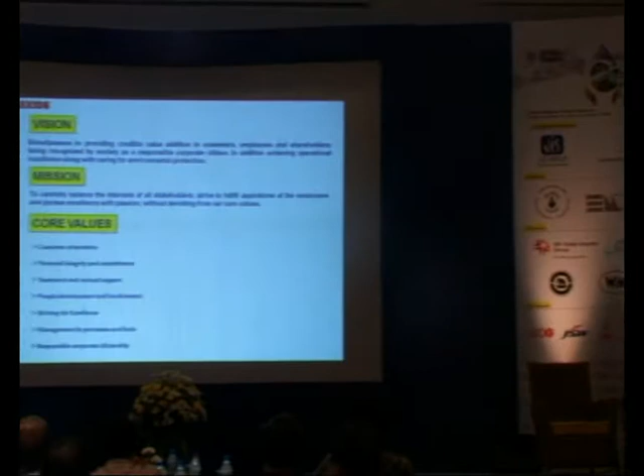Now, just to share, the vision of our organization is to simultaneously provide credible value addition to customers, employees and shareholders, being recognized by society as a responsible corporate citizen, in addition achieving operational excellence along with caring for environmental protection. And why I uttered this corporate vision is that we have to care for our Mother Earth, and we have to act accordingly. The vision is supported by mission and definitely our core values.

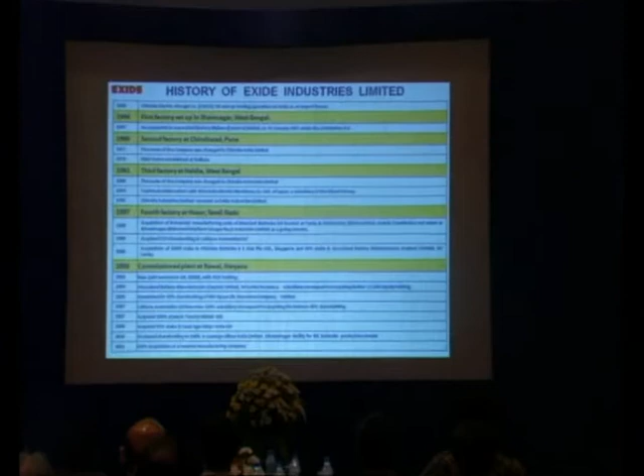Now, history of our industry: our operation started in 1916 as a trading company. Our first manufacturing plant was established in Shamnagar, West Bengal in 1946. Haldia plant is the third plant in the organization. Now, just a quick go-through: we have 7 operating plants, 2 R&D centers, 4 regional offices. We have almost 5,000 employees, 12,000 dealers, and 22 cities are covered with Batmobile service.

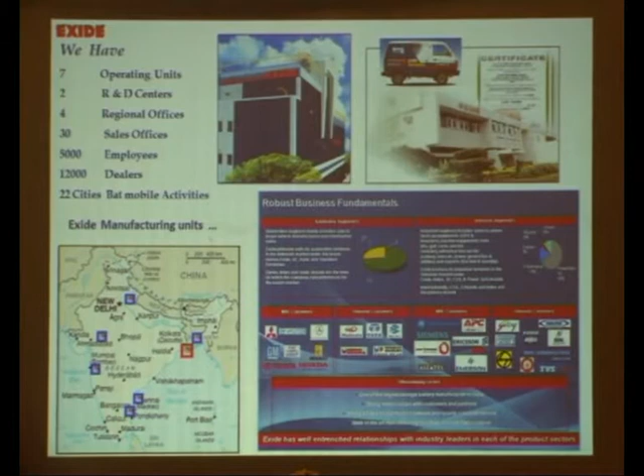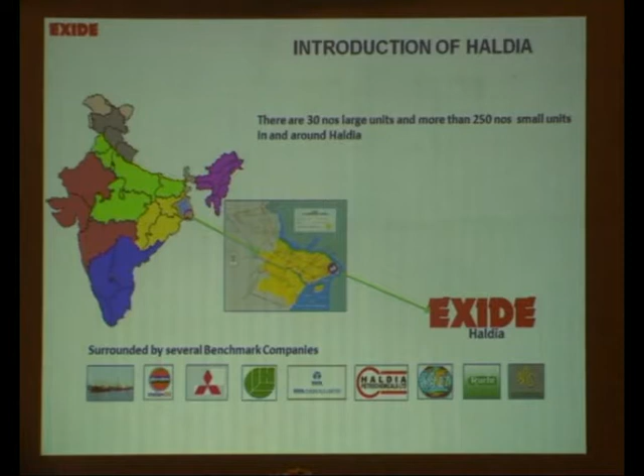It's a very unique service for any battery user. We have a toll-free number. Anybody can call that number and get a free service wherever it is, maybe in house or on the road. Now, about Haldia, our plant is surrounded by a number of benchmark companies, so we have more responsibility to meet the targets.

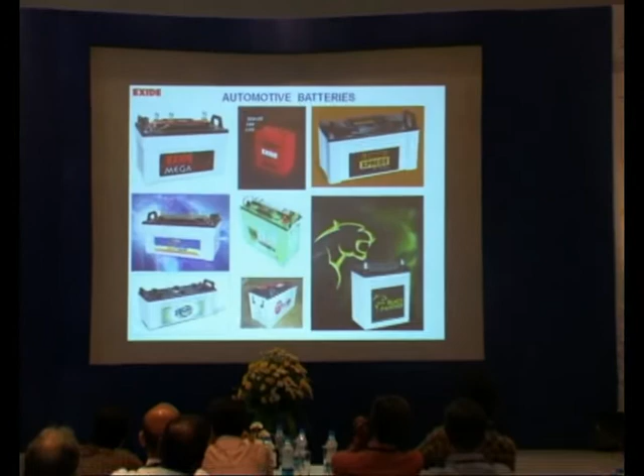As for our plant, we have 42 acres of land, around 48,000 square meters of floor space. And we have around 680 employees, and 2 types of product we manufacture here, automotive and industrial. Now, these are the products used in automobiles and also for home UPS. The products used in industrial applications range from forklifts, golf carts, home UPS, and the Reva electric car, to power plants.

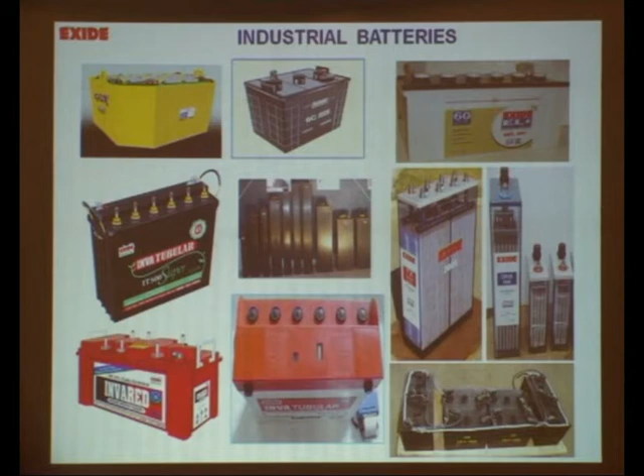We follow systems. We have quality management systems and environment management systems. We are a TPM practicing factory, and we have strong quality circle activities and small group activities for problem solving. Now, in today's discussion, the key focus is on pollution control through effluent treatment, and also process modification so that total effluent volume comes down.

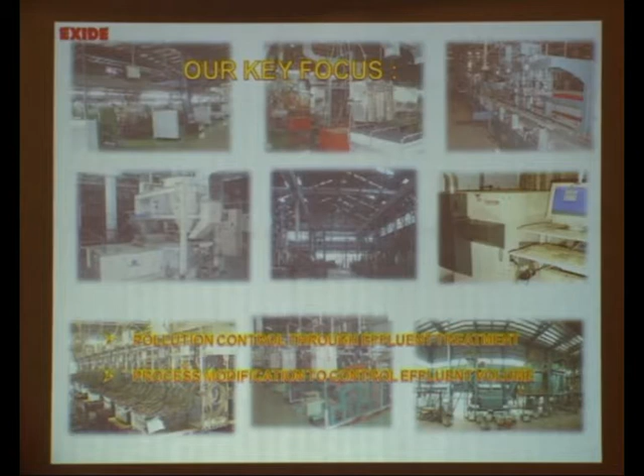Now, just to tell you, the battery is based on lead and acid. Both are very problematic materials, and we also use PP containers as the container for the battery. For using these materials, any battery manufacturing unit has been categorized as a red category industry.

Now, that gives us a lot of responsibility to see the proper effluent treatment is taken care of, because any battery manufacturing unit will require a lot of water to be used, as that is a process requirement. With that responsibility, at each and every stage we take care that the effluent generated is treated properly and reused wherever possible.

We call it plate formation, meaning a green plate is formed as a battery plate. There we have to put a lot of energy in presence of sulfuric acid and water, and that actually makes those plates ready to be used in a battery.

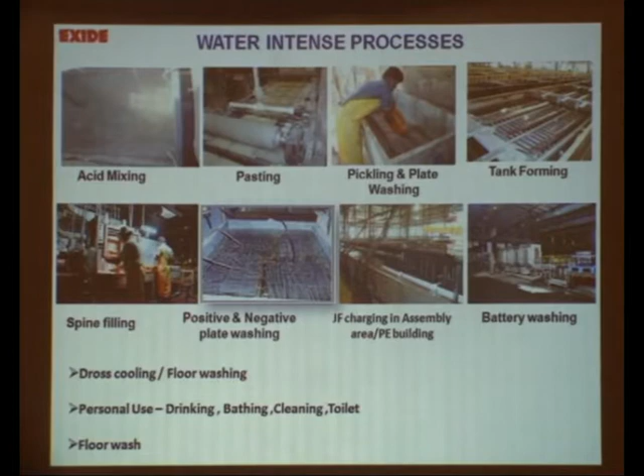Then formation is a process where we put energy from outside, and then other processes are washing and again the formation process. Another is tank charging, meaning the battery after finishing has to be charged before dispatch. So all these processes require a lot of water, and additional water is required for the dross, which is basically sludge of lead, for cooling, and also for personal use and floor wash.

For the implementation plan, after testing the water quality, we found that some areas of water could be reused. Then, through brainstorming, we found out the areas where that water could be reused.

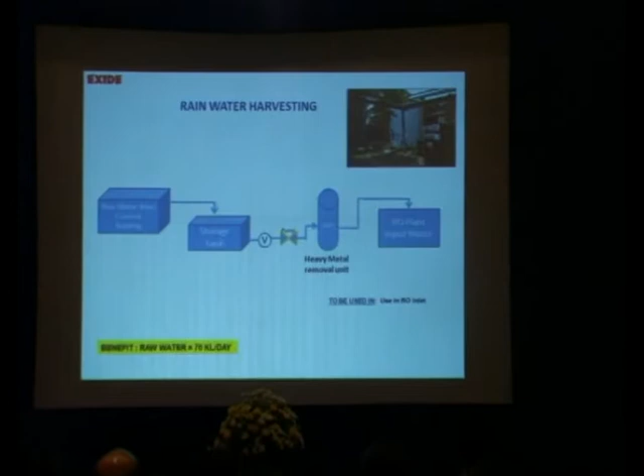The rainwater harvesting plant we have is small, not a big plant, and we have already established this almost in the rainy season. We can save almost 70 KL of water through this plant.

Now, paste recovery system is a process where we actually put active material to a plate. This is basically called the wet process, shown in some photographs earlier. This wet process generates a lot of water which is mixed with acid and lead. We have taken this back to the same process because it has helped us reduce reuse of material, that is lead, and also water.

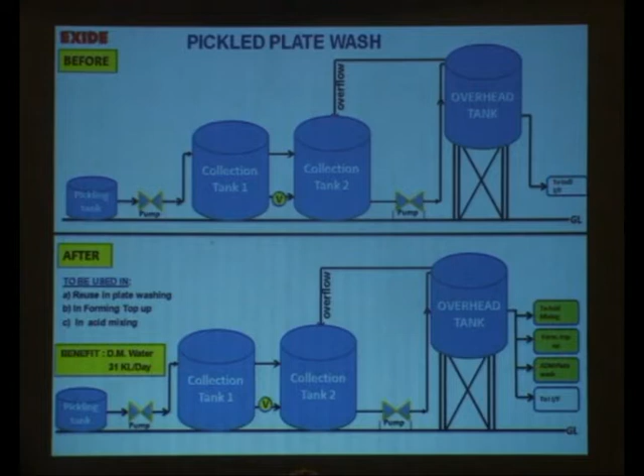Now, sewage treatment plant we are reusing for gardening. Pickling is basically a process where we wash a positive plate, and earlier we used it only for the toilet. Now we have added three more processes where we use this water.

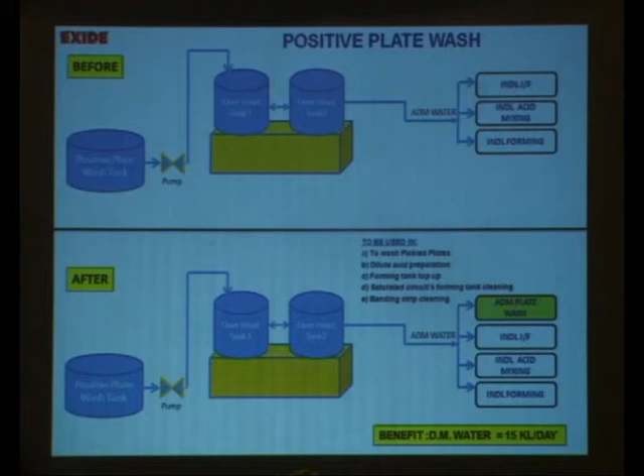Similarly, the positive plate water we started reusing more in one more area. This is an acid recovery plant, which is very important for us. The formation is a process where we put energy into the battery plate in presence of sulfuric acid solution.

Now, this acid used to go to the ETP drain for treatment and then discharge, and it used to generate a lot of sludge. Now we are recycling and reusing this as a top-up acid for the formation process.

Similarly, the acid dilution process was earlier manual, now we have made it mechanized, and in this process we have saved a lot of acid as well as water.

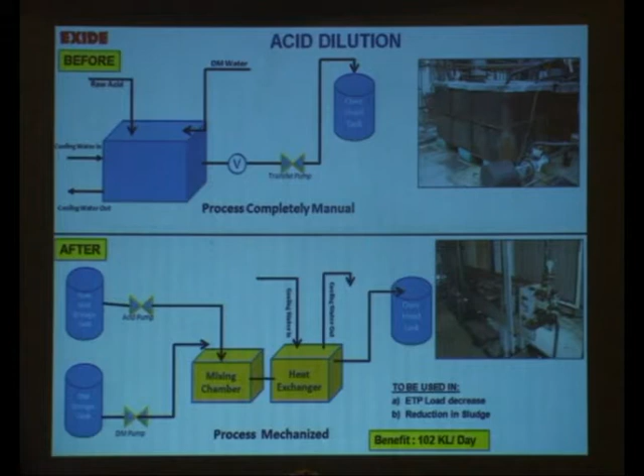This is a process called slurry filling. In this process, we actually fill the positive plate with active material. Earlier the slurries used to go to drain and then to the ETPs. Now we are recycling that - water is being reused and also slurry is being reused.

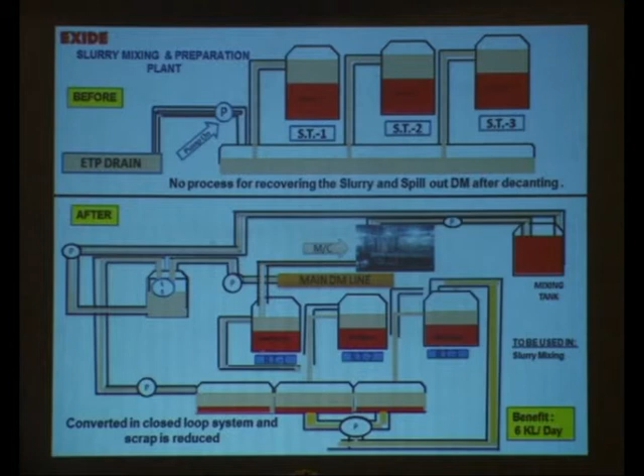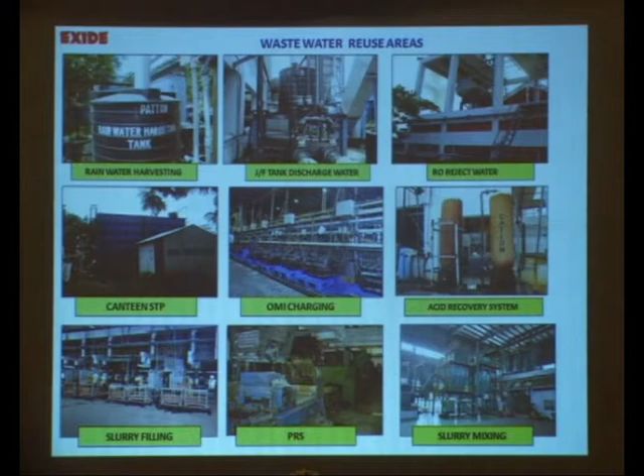Now, the benefits after this implementation - we have got almost more than 300 KL of water saved compared to if I consider today versus 3 years back. These are the areas where the processes or systems we have put in place to reuse wastewater which used to be waste earlier.

Now, results. If you see the consumption of raw water, it has drastically come down. This is a 3-year result which shows from 3 years back to now is almost 25% reduction. Processed water consumption also has come down after implementing this process - last year we got around 10% reduction.

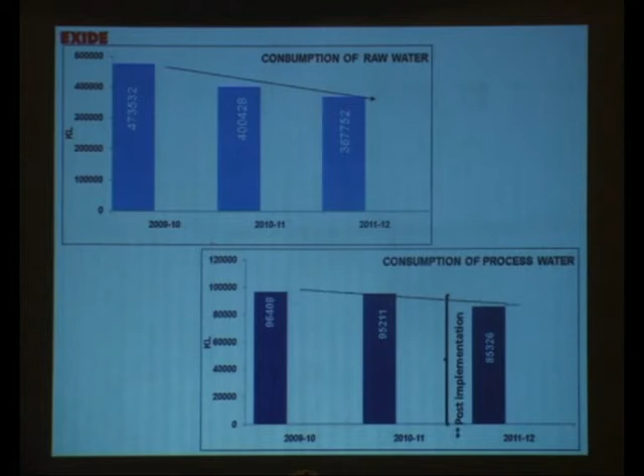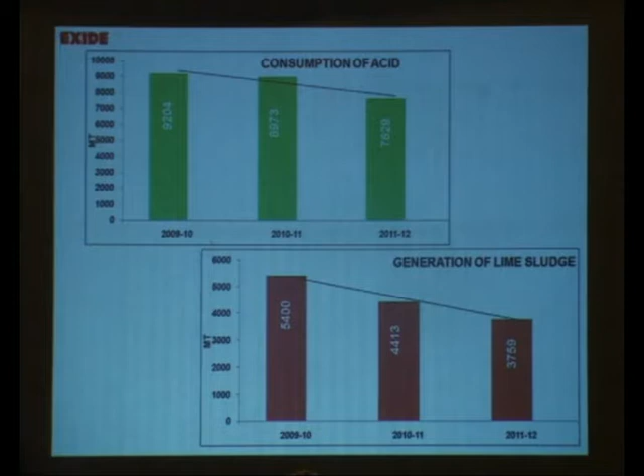Similarly, the consumption of acid has also come down, which is important because our effluent generation mainly contains acid. So in a few areas we have started reusing those acids, and acid consumption has also come down, which resulted in sludge generation in ETP also coming down - almost 15% reduction.

Now, cost benefit - last year we got around 47 lakh in savings by doing these activities.

Now, the thing is that designing and implementing things are very easy, but sustenance is the main process which takes a lot of time, and this is a more focused area, otherwise we cannot survive.

Now, our process of sustenance is that we monitor every day's water consumption. A daily MIS is generated, and I personally look after this water consumption, which also includes the area-wise water consumption.

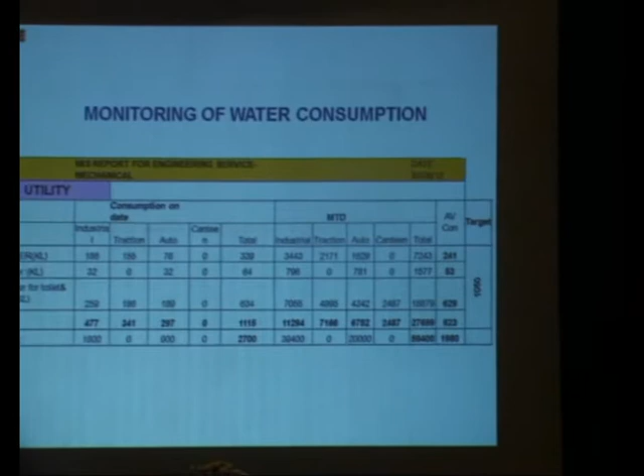Then comes the acidic effluent, concentration of acid in the acidic effluent, because if the concentration is more, then effluent generation treatment will be difficult, and it will generate more sludge.

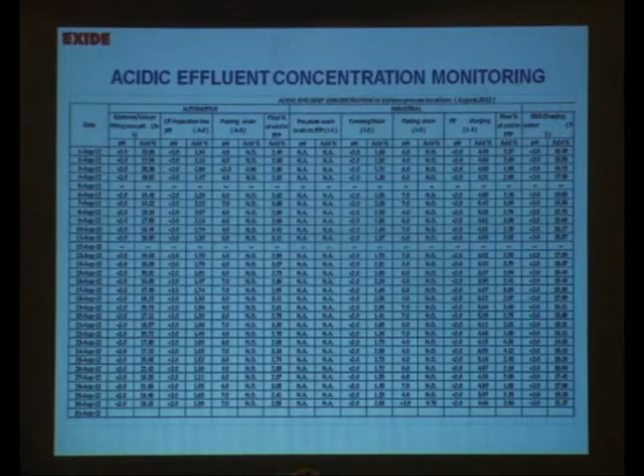Similarly, all ETPs are basically monitored to see the effluent generation, acid concentration, the lime used to neutralize that acidic water, and also the sludge generation. So daily monitoring is done, and the water discharge from ETPs is monitored by us daily and also by external sources.

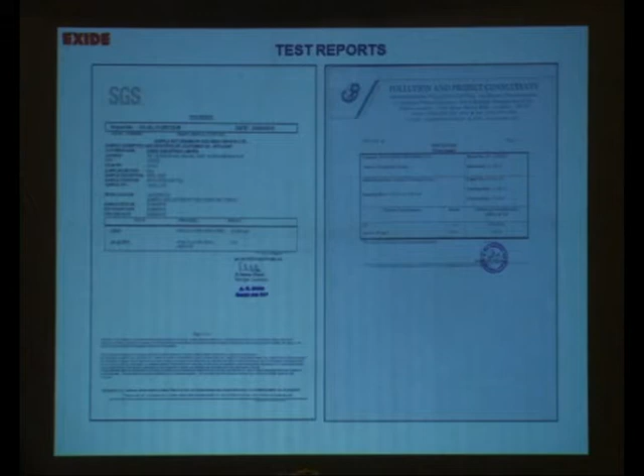Our future target is very ambitious, but the Haldia team has taken the target that today's effluent volume will be reduced by 50% in the next 3 years' time.

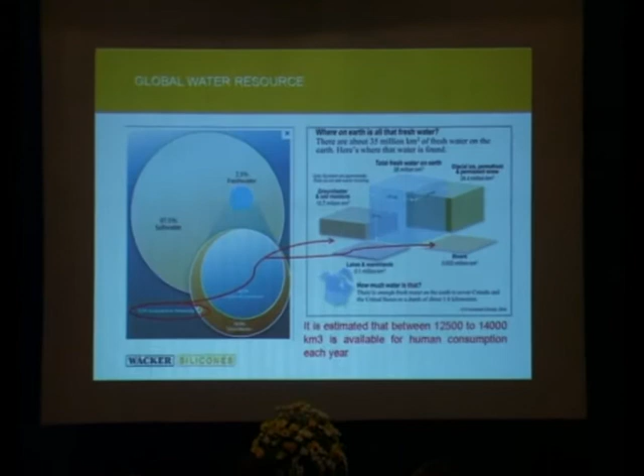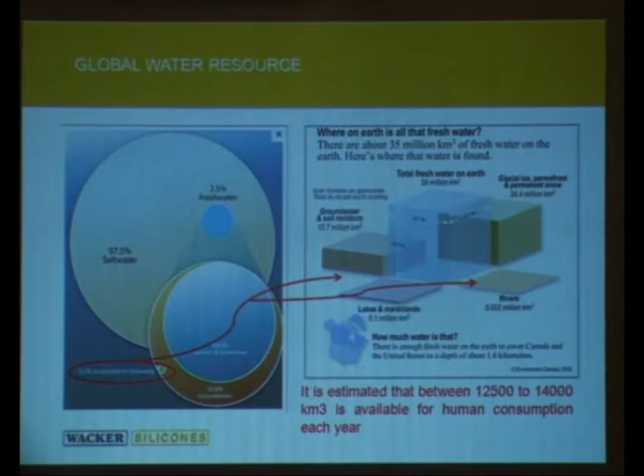Now we come to global water resources. Since our early boyhood, we have learned that on earth there are 3 parts water and 1 part land. It is true, but practically we should know how much water present on earth has accessibility to humanity. Of total water on earth, salt water is 97.5% and fresh water is 2.5%. Of this 2.5% fresh water, around 70% is glaciers and snow cover, 30% is groundwater, and only 0.3% is accessible to humanity. In figures, there are about 35 million cubic kilometers of fresh water on earth, of which groundwater and soil moisture is 10.7 million cubic kilometers, glacier ice, permafrost and permanent snow is 24.4 million cubic kilometers, lakes and marshlands 0.1 million cubic kilometers, and rivers 0.002 million cubic kilometers.

Humans can take water from groundwater, rivers, lakes and marshlands. What is the amount? It is estimated that between 12,500 to 14,000 cubic kilometers is available for human consumption each year. Still, we have shortage — for 1 billion people, safe water is scarce. Many countries in Africa, the Middle East, Western Asia, and some Eastern European countries have lower than average quantities of freshwater resources available to their population.

Population pressure on resources: due to rapid population growth, water availability is reducing drastically. It was 12,900 cubic meters per capita per year in 1970, reduced to 9,000 cubic meters per capita per year in 1990, again reduced to 7,000 cubic meters per capita per year in 2000, and expected to drop to 5,100 cubic meters per capita per year by 2025.

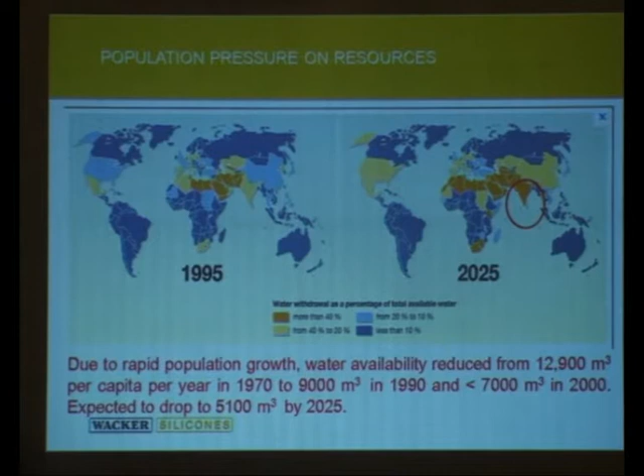And what is the scenario in India? Up to 1995, we were in the safe zone, withdrawing about 20 to 30% of total available water. But after that, due to rapid industrialization and population growth, withdrawal of water increased to 40% and above, which is alarming. From the above statistics, it is very clear that we have to recycle water at every stage of use so that in future we may remain safe.

This is a typical water cycle in a region where water is used in different areas — irrigation use, municipal use, and industrial use — and all are stored in closed circulation.

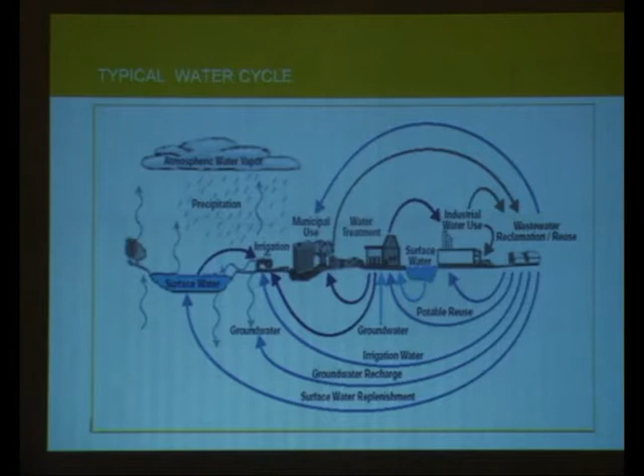Now, paper industry in India. At every step in the manufacturing process, our goal is to use as little water as possible and to reuse water whenever possible. Pulp and paper making is a water-intensive process, so we will discuss water recycling in a paper manufacturing unit as a model. Before explaining the water cycle, here is a brief of the process so that it will be clear what is the role of water in the process and what are the scopes of reuse.

Process brief: paper could be made from virgin pulp, from bamboo, soft and hardwood, agricultural residue like bagasse, straw, etc., or from recycled fiber, that is waste paper. Here we will discuss the process with recycled fiber. What is the advantage of recycled paper? The production of recycled paper has significant environmental advantages over virgin paper production, including less impact on forest resources, less air pollution, less water pollution, less water consumption, less energy consumption, and less solid waste. One ton of recycled paper uses 64% less energy, 50% less water, 74% less air pollution, saves 17 trees, and creates more jobs. But there is some disadvantage.

As fibers are recycled, they get shorter, which decreases strength, so they can be reused only 5 to 7 times. So a certain amount of long fiber derived from virgin pulp is added in the process as required.

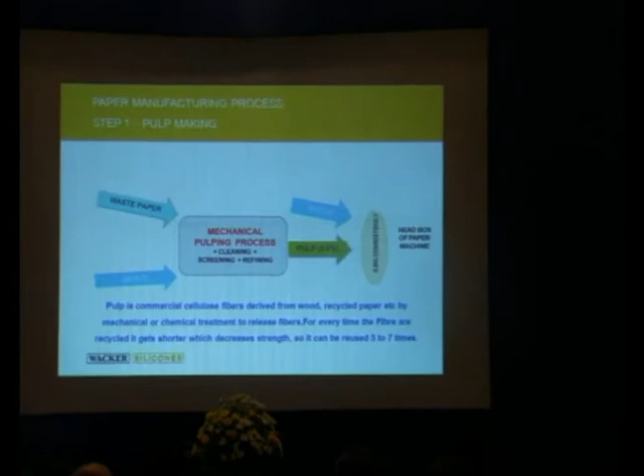Paper manufacturing. Now let us explain the process of paper manufacturing. Paper making is a twofold process. The first step is pulp making. Pulp is commercial cellulose fibers produced from waste paper by a mechanical process. Water is added in this section to make the pulp 4% consistency, so the process of cleaning, screening, and refining can be done. After that, we get the fibers to a pulp with desired characteristics. Typical water addition required is about 25 m3 per ton of paper.

In this process, a significant amount of wastewater is generated, which contains many impurities such as pins, plastics, glues, a certain amount of fines, etc. After separating some impurities from water with the help of vibrating screen, hole screen, and specific equipment like turbo separator and centri-cleaner, this water is treated separately in subsequent stages. After that, this processed pulp is fed to the paper machine for making paper.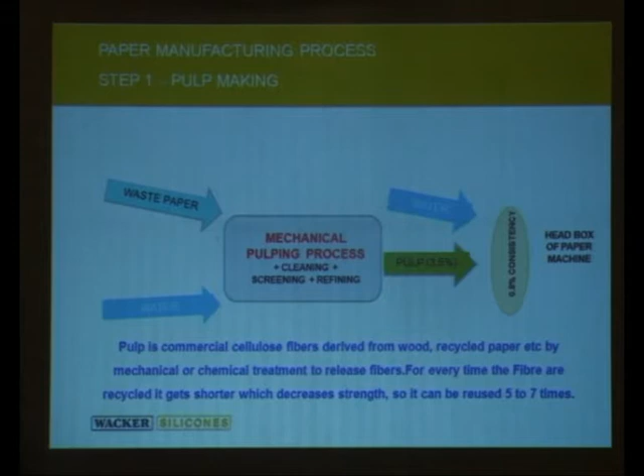And the paper machine. As paper is a general term for a sheet of fibers formed on a fine screen from a water suspension, the stock solution from the pulp mill is further diluted to a consistency of 0.7 to 0.8 before it is pumped to the head box of the paper machine. Typical water addition required in this section is 125 m3 per ton of paper.

During the first part of the paper machine, called the wet section, water is removed by gravity and vacuum suction. The resulting paper web has 25% solids. If the rate of production is 6 tons per hour, water removed will be 720 m3 per hour in the wet part. And the press part: at the end of the wet section, the paper web is moved from the wet end wire to the press section with the help of felt. The paper is pressed between large rolls, which removes water from the paper web, and the dry content is increased to 50%. If production is 6 tons per hour, water removed will be 12 m3 per hour.

And the final part of the paper machine is the dry end section. The paper is so strong that it does not need any supporting wire or felt. Here additional water is removed with the help of steam heated dryers, so the dry content increases to 94%. At 6 tons per hour rate, water removed will be 6 m3 per hour in this stage.

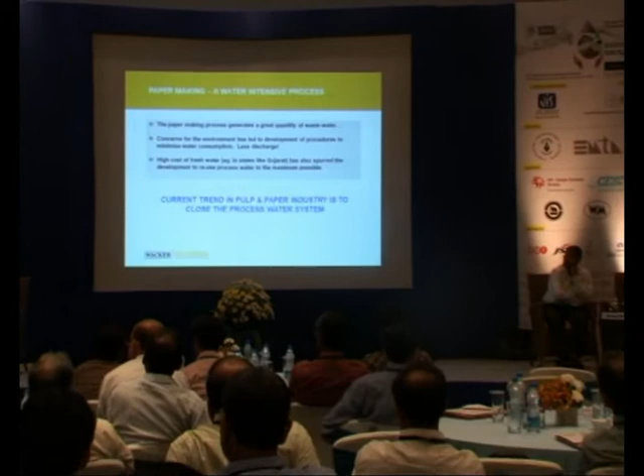So it is clear, paper making is a water intensive process. It generates a great quantity of wastewater. Concerns for the environment have led to development of procedures to minimize water consumption and discharge. The high cost of fresh water has also spurred the development to reuse process water to the maximum possible. So the current trend in the pulp and paper industry is to close the process water system. This system will reduce the freshwater intake.

This is a typical water flow in a closed water system paper plant. How is the closed water system made? Water received from the wet end section and press section is pumped back to the system through the white water tank, wire pit and silo. This is called the short chain white water system. Some fresh water is added to maintain the mass balance, around 2 m3 per ton of paper. The remaining water is sent to the pulp mill for fulfilling the process requirement. Discharged water from the pulp mill, after being regenerated through Krofta and ETP, is used in some areas of the pulp mill and paper machine. However, water reuse is accompanied by accumulation of non-process elements and increase of microbiological activity.

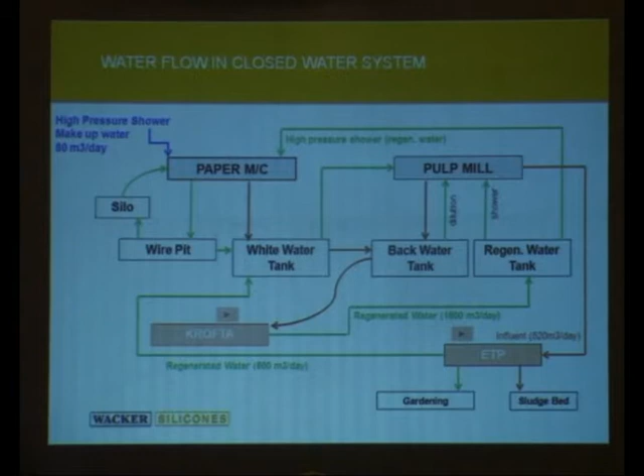Now, how do the non-process elements come into the closed water system? During the processing of pulp, some of the fibers are broken down into small fragments called fines. These fines are further degraded so that short chains of polysaccharides are formed and dissolved in water. Next is retention rate. Cationic polymers added to the furnish bind several negatively charged regions, thus improving the retention of fibers, and are also present in the closed water system. And internal sizing. Internal sizing can be done under acidic conditions with rosin together with aluminum sulfate. These residues are present in the white water system.

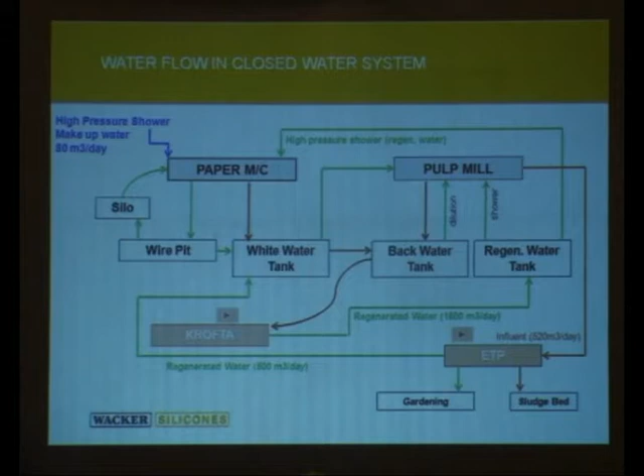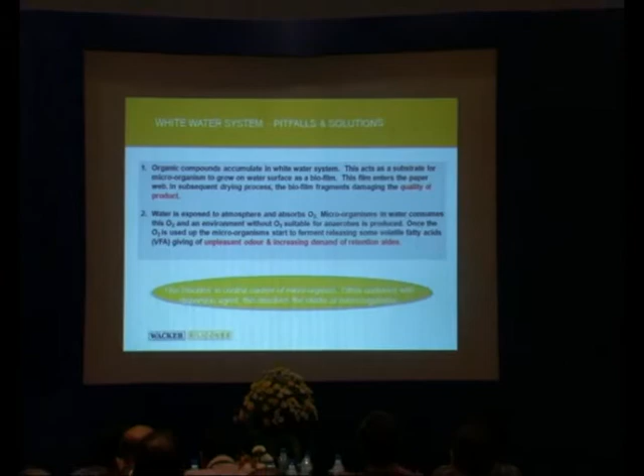So the closed white water system has got some pitfalls which can be solved to a certain extent. Organic compounds accumulate in the system, which act as a substrate for microorganisms to grow on the surface of the white water system as a biofilm. This film enters the paper web, then the drying process shrinks the biofilm fragments and deteriorates the product quality. Some portion of the processed water is exposed to the air, where microorganisms start to ferment. Thus volatile fatty acids are produced, which result in unpleasant odor which may not be acceptable.

Inorganic ions accumulate and increase the temperature of white water. This high temperature coupled with anionic ions creates corrosive conditions. Different additives added in white water affect the process in the form of stickies, pitch and anionic trash. Cations in the white water system, if present in high concentration, decrease the paper strength by decreasing the number of interfiber bonds. So suitable measures are to be taken.

What are the measures? To control the microorganisms, biocides are used, combined with a dispersion agent to dissolve the clusters of microorganisms. Membrane filtration is adopted to reduce the COD discharge. And the cumulative effect of a closed water system: it will increase total and dissolved organic carbon, total suspended solids and chemical oxygen demand.

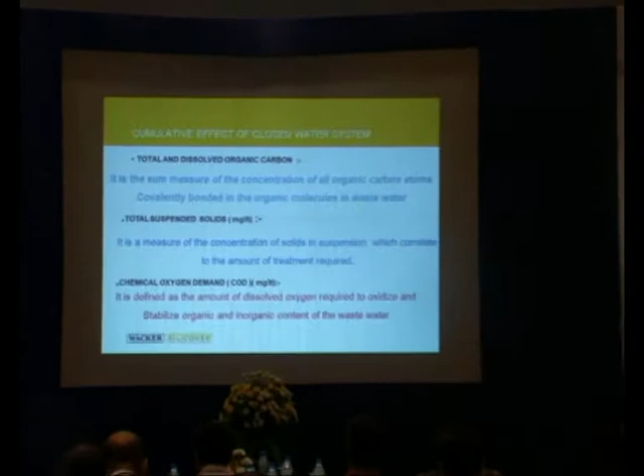Up to this point, we see that in paper making a sufficient amount of water is added to release the fibers and to make the sheet formation, and then it is drained out to make the dry sheet. But in between this process, water becomes contaminated as discussed, and after taking suitable measures, it can be reused.

Requirement of makeup water in closed water system. Although we make the water system closed, there are some losses, so we need to compensate for that. Here is the estimate. Loss in paper machine, that is 1 m³ per ton of paper. High pressure shower press section, that is 0.5 m³ per ton of paper. Steam condensate loss in pulp and paper machine. And boiler CBD, that is 200 m³ per day. And domestic use, 10 m³ per day.

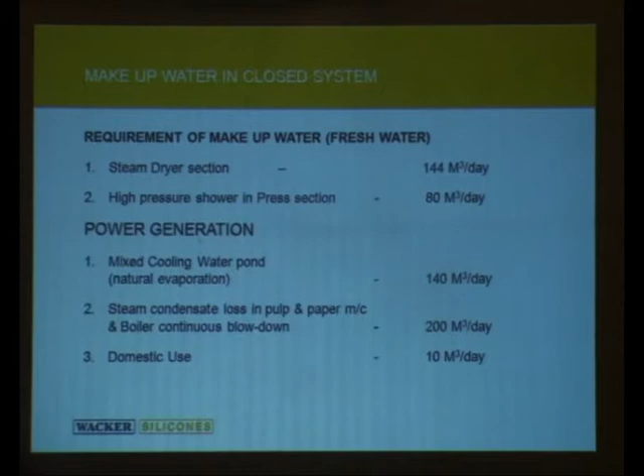So it is clear that to run the process effectively without compromising the quality, we should adopt some treatment process so that we can reuse the wastewater in the process, out of which Krofta is an equipment which is based on the dissolved air flotation technique. Here is a process brief. Wastewater is fed into the system with addition of flocculants, and air is dissolved under pressure in the liquid, which is then released to atmospheric pressure in the flotation tank.

As the microscopic air bubbles come out of the solution, they attach to the suspended solids in the liquid, causing them to float to the surface, forming a thick sludge. A special skimmer removes the sludge with the help of a spiral scoop and passes it into the stationary center section, from where it is discharged by gravity for either recycling or disposal. Water extracted from the system normally has less than 150 ppm of suspended solids.

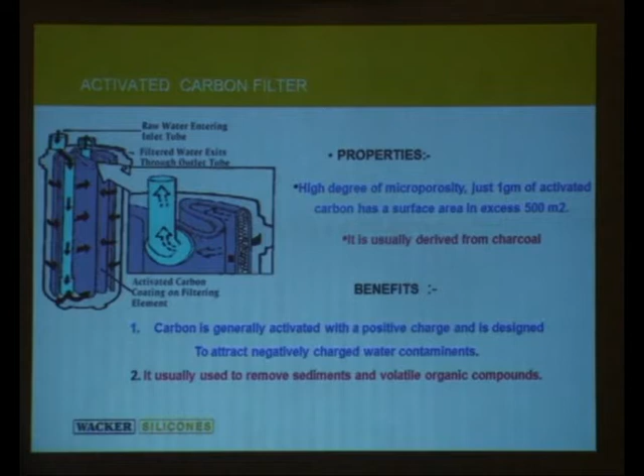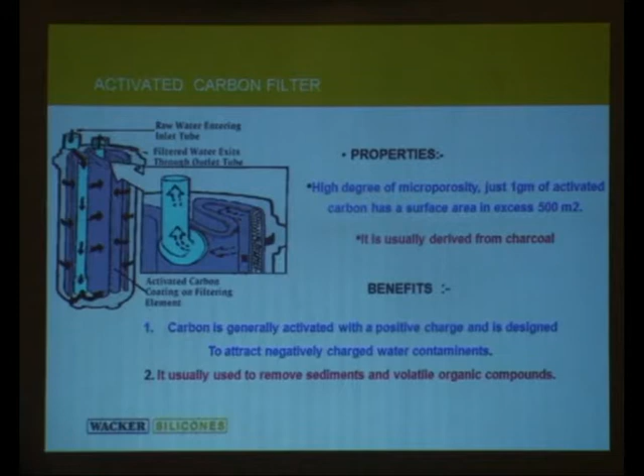And next is the activated carbon filter. The activated carbon filter is used after Krofta to reduce the TSS further so that it can be used in paper machine showers. Here, carbon is generally activated with a positive charge and is designed to attract negatively charged water contaminants. Thus, sediments and volatile organic compounds are removed. And the last stage is ETP.

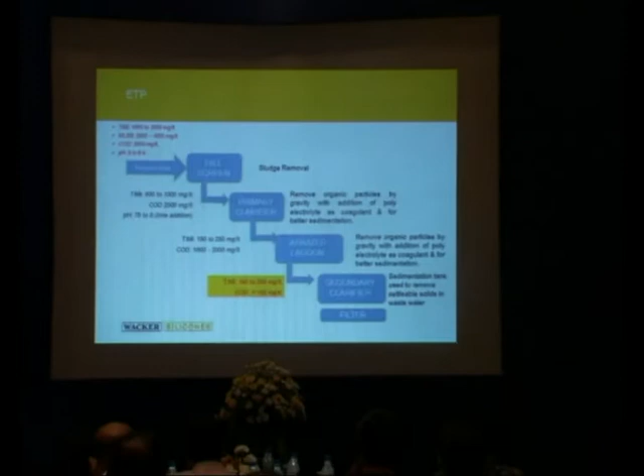We get some quantity of wastewater from the paper mill, which is treated in the ETP through various processes. The wastewater coming from the paper plant has TSS of 1,800 to 3,000 mg per liter and COD value of 3,000 mg per liter. In order to reuse this water in our system, we should maintain TSS of 100 to 150 mg per liter and COD less than 150 mg per liter. For this, we first use the screen for removal of TSS to a certain extent. Then we pump this water to the primary clarifier with a pH of 7 to 7.5 by adding lime.

In the primary clarifier, we use coagulant, which destabilizes suspended solids, and by this the suspended solids coagulate, and by gravity they go to the bottom and are taken out as sludge. In this stage, we reduce the TSS value to a maximum of 250 mg per liter and COD value of 2000 mg per liter.

And now is the conclusion. One cannot overemphasize the importance of process water conservation to improve water usage in the paper industry. Each plant needs to analyze its process and water consumption points to reduce the usage. It is a process of continuous improvement. As most industries depend heavily on groundwater, steps like rainwater harvesting should be invested in to preserve the water table. Sensible usage alone can ensure the sustainability of industry.

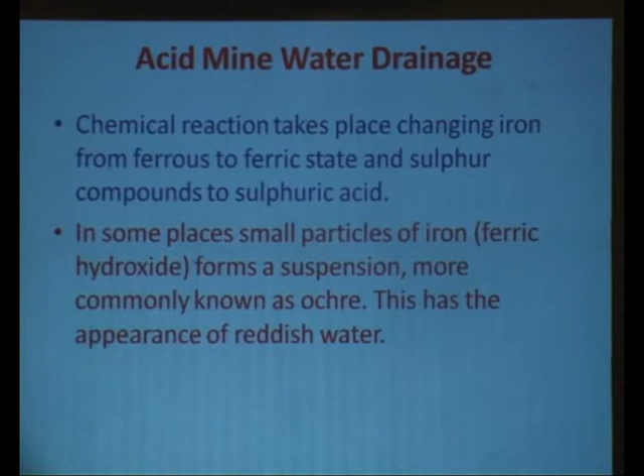Besides this, we have acid mine drainage. Chemical reactions take place, changing iron from ferrous to ferric states and sulfur compounds to sulfuric acid. In some places, small particles of iron form a suspension, more commonly known as ochre. This has the appearance of reddish water. Treatment of acidic effluents is conventional neutralization: pumped to a central location to be neutralized by alkaline chemicals. Biological treatment of acid mine drainage uses a series of shallow ponds lined with lime and planted with native types of plants. Such wetlands are passive systems requiring little or no continuing maintenance.

Now, reuse of treated mine water. Generally, mine water is being used for domestic use in and around the coal mines, for the populace staying there or the villages in and around, supplying drinking water to the colony or utility buildings and the villages. Some of the mine water is used for agriculture purposes and stored in mine voids for groundwater recharge and as a source of income for villages by pisciculture.

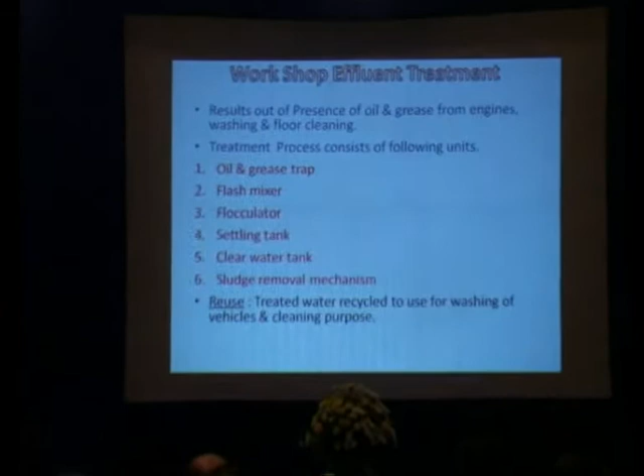Measures for future major water users may be identified along with the quantum and quality, and mine water treated accordingly. Besides this, we are polluting by workshop effluents, resulting in the presence of oil and grease from engines, washing and floor cleaning. Generally, we treat these workshop waters and reuse this treated water for washing vehicles and cleaning purposes.

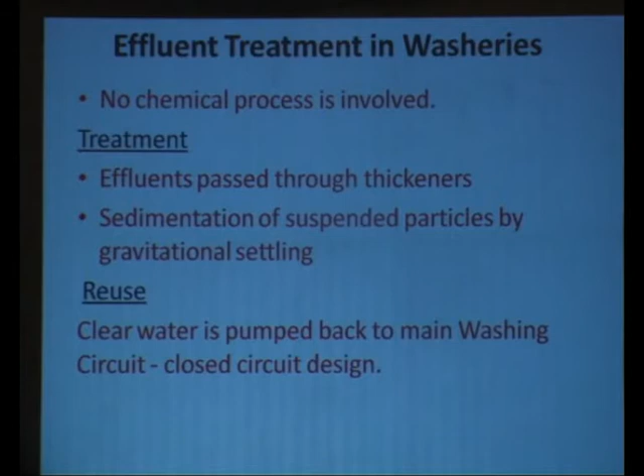Effluent treatment in washeries: no chemical process is involved. Effluent passes through thickeners, with sedimentation of suspended particles by gravitational settling. We reuse this washery water again for the washing of coal through a closed circuit design. Now, domestic effluents, of course, are very less in our mined out areas. In large colonies, sewage treatment plants are constructed, especially where as many as 1,000 quarters are there.

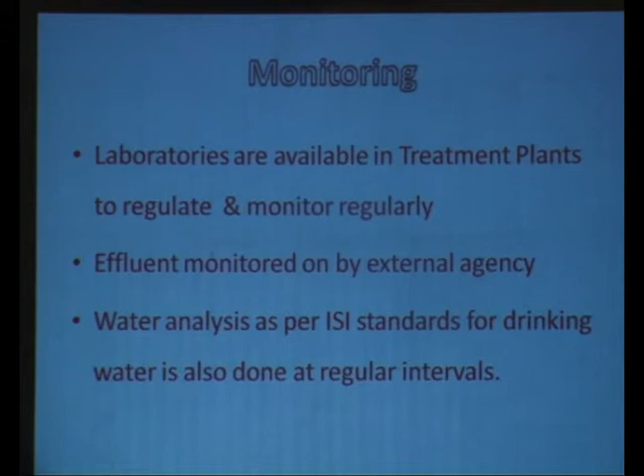However, in the small mines, we do not have any effluent plants. Sewage treatment plants use extended aeration lagoons and activated sludge methods. Treated water is used for tree plantation or agriculture purposes. Monitoring laboratories are available in treatment plants to regulate and monitor regularly. Effluent is monitored by an external agency, and water analysis as per the ISI standard for drinking water is also done at regular intervals.

Now, water conservation. Generally, it is reused as drinking water supply to the colony and utility buildings, with surplus supplied outside. In the Asansol area, in the Raniganj coal field, we have a large number of closed mines where there are huge water sources. And Asansol municipality has planned to take out that water for users in the Asansol municipality area. So in future, wherever mining operation is completely finished, that water can be stored and used.

However, we cannot keep it there until the total mining operation is completed because of safety reasons. A nearby mine cannot be operated unless we take out all the water in and around. Otherwise, for safety against inundation of the people, this has not been statutorily allowed.

Issues of concern of coal mining. High concentration of thermal power plants, steel plants, cement plants and ancillary industries located in and around mining areas leads to high pollution. Coal mining operations do not involve any chemical processes. The bulk of pollution is caused by vehicle transport and other industries. However, restrictions are imposed on mining. Due to CEPI, new expansion projects cannot be taken up in such areas, affecting growth of coal production.

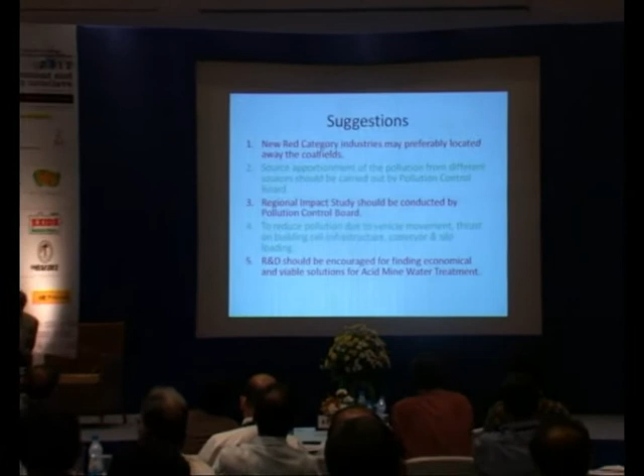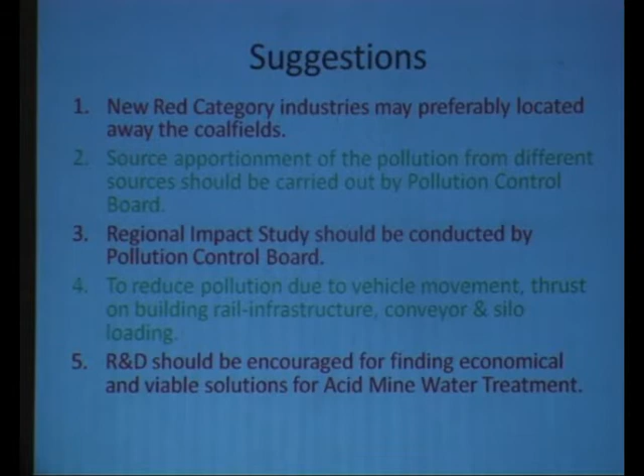Suggestion: new red category industries may preferably be located away from the coal field. Source apportionment of pollution from different sources should be carried out by the Pollution Control Board. A regional impact study should be conducted by the Pollution Control Board to reduce pollution due to vehicle movement, with thrust on building rail infrastructure, conveyor and silo loading. R&D should be encouraged for finding economical and viable solutions for acid mine water treatment.

Results of efforts undertaken to restrict water pollution and conserve water in mining areas are not up to the mark. We admit that we are not doing whatever we should to control water pollution in and around the mining field. However, our attempt is to restrict this pollution in and around the mining area due to the mining operation. Special attention is needed to arrest pollution from runoff rainwater from dumps and stocks. Repeated campaigns are needed to sensitize mine operators. Increasing general awareness about water pollution in local populations is suggested.

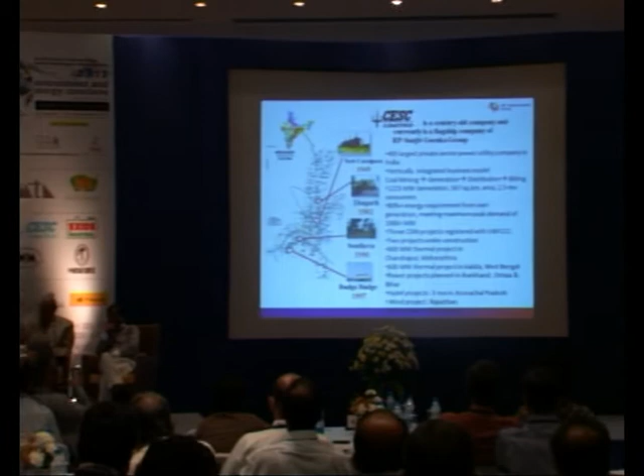CESC is a vertically integrated power company. We are a part of RP-Sanjiv Goenka Group. We have our own coal mine, our own generation, our own distribution network, and own billing system. We supply power in and around Calcutta. 80% of the energy consumed by the city is supplied from our generating stations.

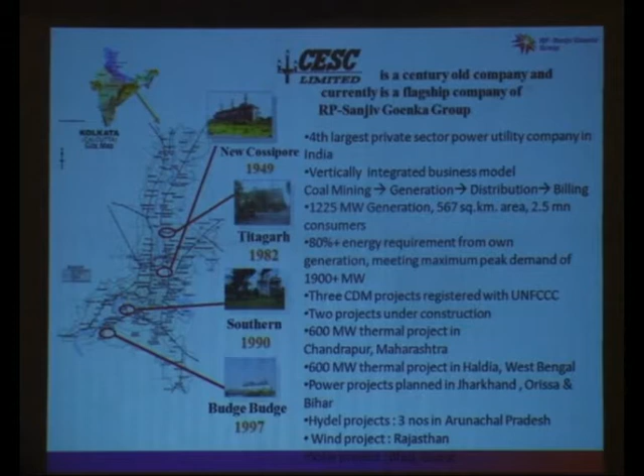Previously, we were only concentrating in Calcutta. Now we have gone to Maharashtra. In Chandrapur, we are erecting one 600 megawatt thermal power plant, and we are erecting one more in Haldia. We are expanding our business in Jharkhand, Odisha, and Bihar also. We are erecting 3 hydro projects in Arunachal. We have gone for wind power in Rajasthan and recently commissioned a 7 megawatt solar project in Gujarat.

In our power station, our aim is to produce maximum uninterrupted power at lowest cost in an eco-friendly way. We believe in sustainable growth. Being based in the city of Calcutta, we take different proactive measures in the areas of environment like emission management, water management, solid waste management, etc. We also give thrust on energy efficiency and conservation efforts.

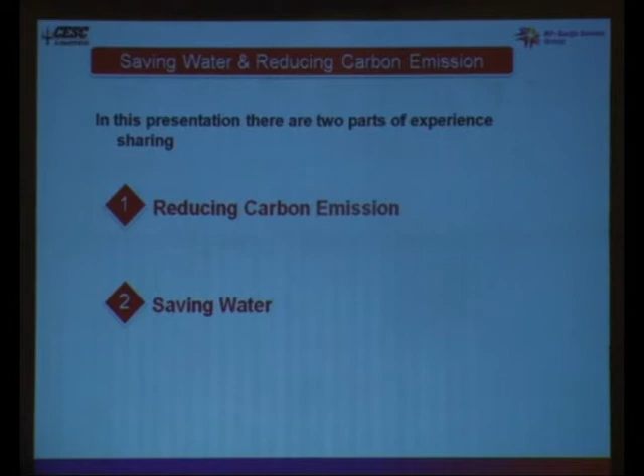I am splitting this presentation in two distinct parts: reduction of carbon emission and saving of water. Reduction of carbon emission occurs when a lesser amount of fuel is burnt for the same amount of electricity. Similarly, saving of water occurs when the process consumption is reduced and water is reused.

In a conventional power station, air, water and coal are the main inputs, and from the power station different types of effluent go out. Solid waste, basically in the form of ash, goes out, and we take some auxiliary power to run our own plants, and finally the electricity goes to the customer. What have we done? We have reduced the coal input by improving heat rate. Heat rate means the amount of heat required for production of a unit of electricity.

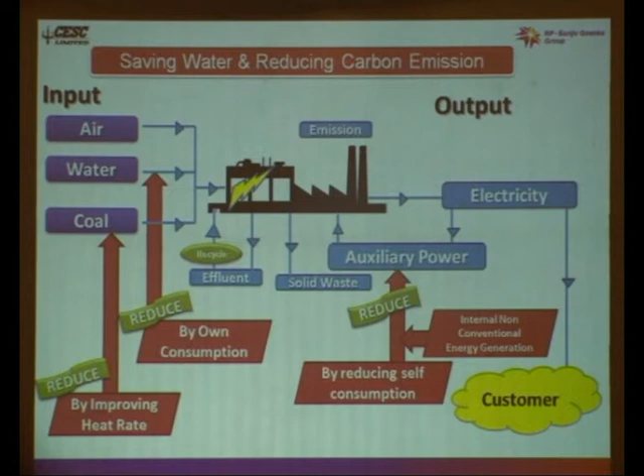We reduce the consumption of water by controlling the process. We reuse the effluents, we reduce the auxiliary power consumption, and we try to make some internal non-conventional energy generation to reduce our auxiliary consumption. So these four main reduction processes, shown in green, are our initiatives.

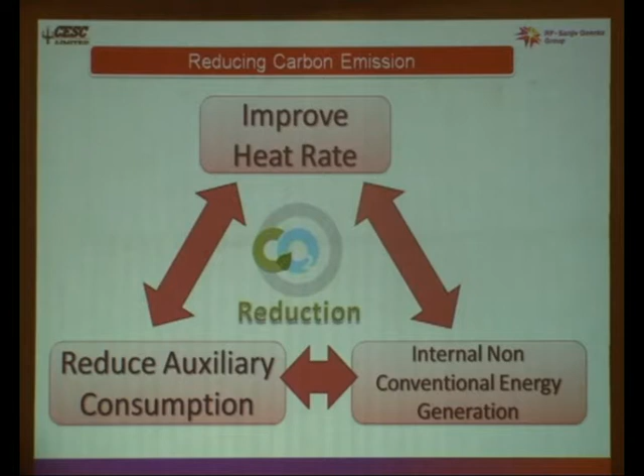Reduction of carbon emission. Carbon emission is reduced by improvement of heat rate, reducing auxiliaries, and development of non-conventional energy within the power station. When we reduce 1 million units of electricity, that is equal to 1,000 tons of CO2 reduction.

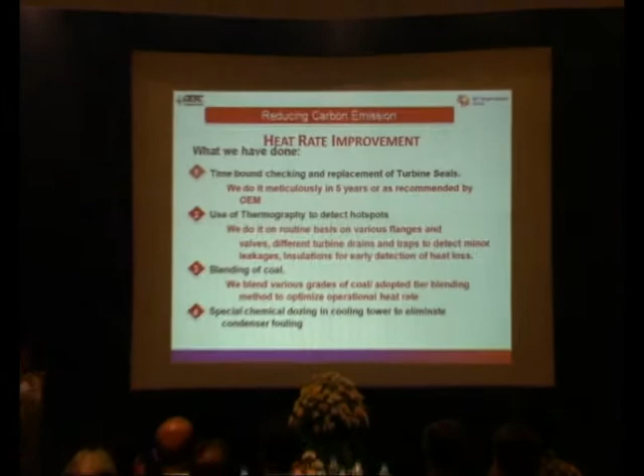Regarding heat rate improvement, I am showing some points on what we have done. We do time-bound checking of turbine internal seals. We open up the turbines at regular time intervals to have the needed efficiency. We use thermography and hotspot systems to pinpoint the leakages from various drains and traps. We blend coal for better burning, and we use special chemical dosing in the cooling tower to eliminate condenser fouling.

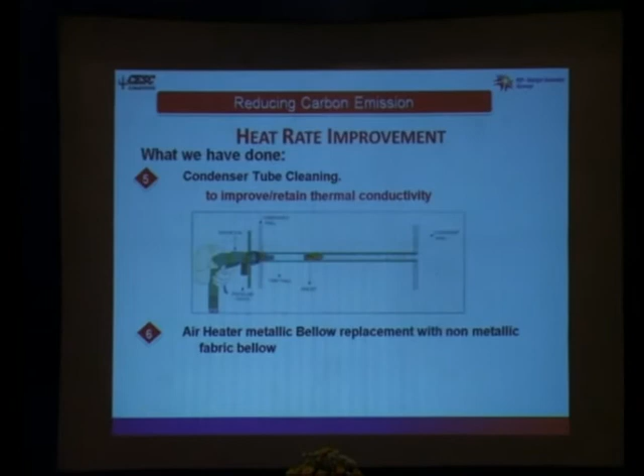Also, to improve the heat transfer coefficient of condenser tubes, we clean them with bullets, and to reduce air leakages of the air heater bellows, we have used non-metallic fabrics in place of metallic bellows. Practically, we have done several other individual processes. Due to shortage of time, I am not going to describe everything.

In the last 8 years, we have come down from an average heat rate of 2700 to 2350, more than 10% savings, which means about 5 lakh tons coal saving and 967 million units of saving of electricity. And 5 lakh tons of coal is almost 140 crores to us. So that we have saved by these methods.

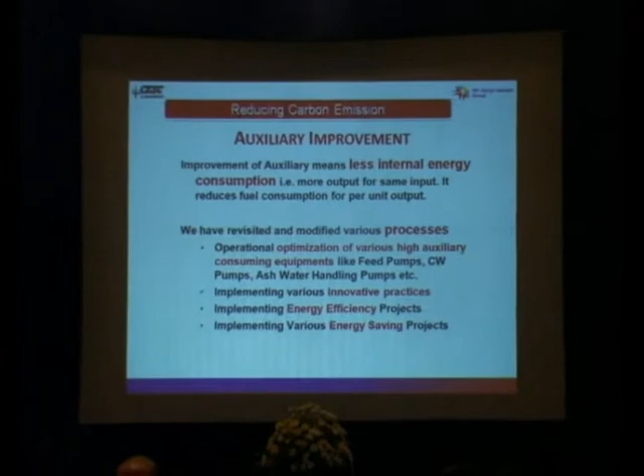Regarding auxiliary saving, we initiate different innovative practices and implement energy efficiency and energy saving projects. Regarding efficiency enhancement and improvement projects, I am giving one or two of them. We have used variable voltage, variable frequency drives in the case of big motors. In the case of ID and FD motors, previously the output was throttled and more energy was being consumed by those motors. Now we control the speed with variable voltage, variable frequency drives.

We have seen that some of our pumps were developing more than the required pressure. We have done some stage blinding and made them suitable just as per the pressure requirement of the process, which reduces the energy consumption.

Several other activities were taken: all volatile treatment to reduce the level of drainage, conversion of air atomizing in place of steam atomizing, intermittent blowdown of plate settlers, optimizing CW pump operation, reducing throttling losses of PA fans, reducing the number of conveying compressors based on ash water hopper level monitoring, and auto timers for power supply of office blocks.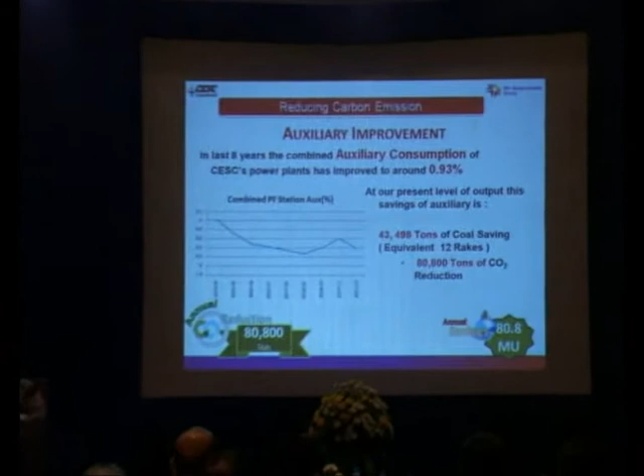We incorporated a timer circuit in controlling outdoor lighting. Several other small activities we have taken throughout the plant. By that way, we have reduced almost 1% of auxiliary consumption, which is about 80 million units saving to us.

Auxiliary saving means free energy available without any extra input, and that free energy goes to the customer. With this saving project, we got 3 UNFCCC CDM projects certified by UNFCCC, and we have received so far 18 crores from these projects. CESC is the first thermal power plant to have such projects.

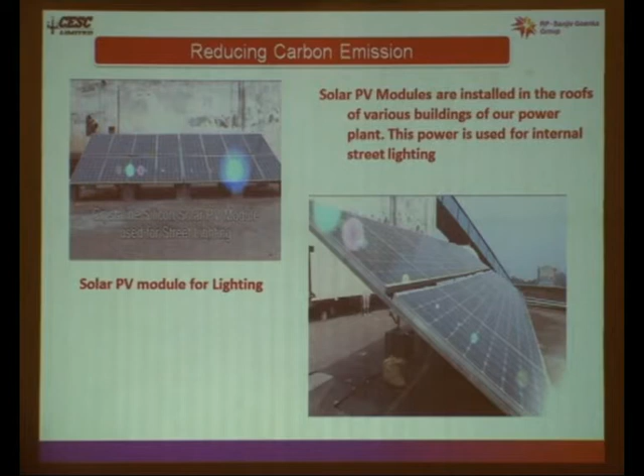Regarding internal non-conventional energy, we have gone for solar lighting, and one innovative thing I will show: from the power station outlet water of the outfall, we have erected micro turbines, and we are generating 2 into 15 kilowatts, that means 30 kilowatt power on a regular basis. We are erecting the third one.

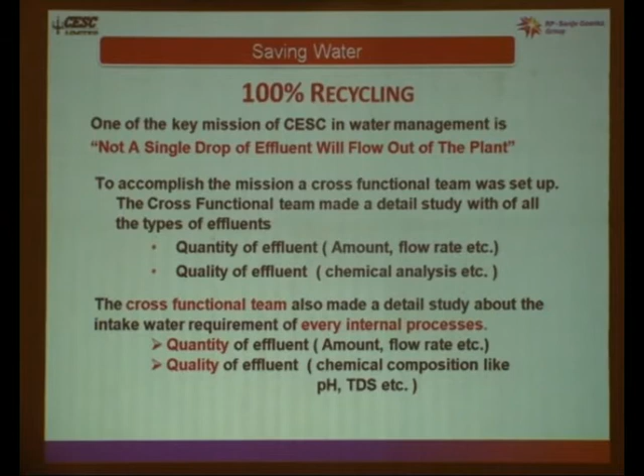Now I am going to saving of water. Regarding saving of water, our motto was 100% reduction in effluent outlet. We declared not a single drop of effluent will flow out from our station. For that, we formed cross-functional teams to analyze quality and quantity of each of the process outputs.

They thought about how it can be best used for the next process. So one process output, with minimum correction, is used for the next process, so that the whole thing remains cost effective.

In the conventional process, what happens? When process A and process B run, water comes from the river to process A, and after that it goes back to the river after statutory treatments.

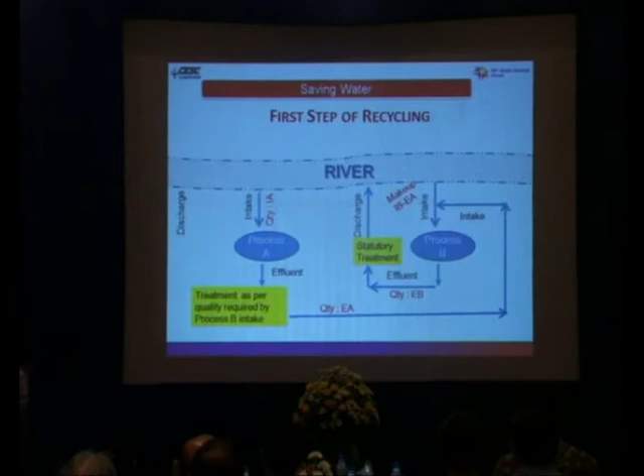But what we have done: once we have taken water for process A, after treatment we use it as the intake of process B, and that goes to discharge. It was the first step of recycling.

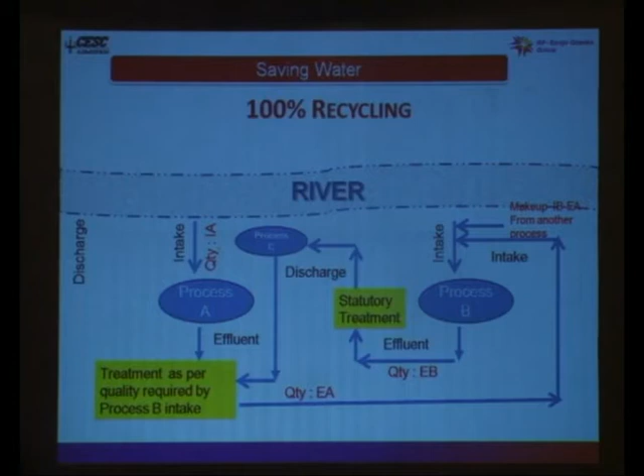Finally, what we did: we take water of process A, use that as inlet of process B, then retreat the process B effluent outlet to process C, and that process C is again recycled. Not a single drop of water goes out from any of our generating stations as effluent.

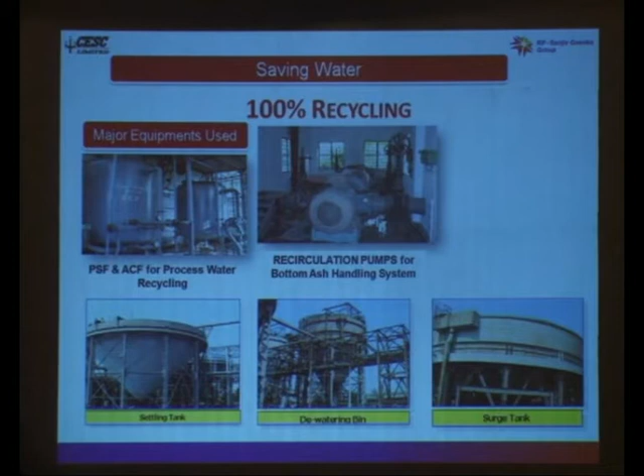The whole thing is done by our engineers internally without any external help and at minimum possible cost. These are the processes we have used: different PSF and ACF plants, different recirculating plants for ash, different hydrobins, settling tanks.

Now I will share one of the innovative things we have done, that is root zone technology. This is done for septic tank outlet. When we say not a single drop of water will go out from the station, it is very difficult, because water like septic tank outlets cannot be easily treated in conventional ways.

Here, we are treating it in a method called root zone technology, where a special type of canna trees are placed on gravels and slanting gravels, and at the inlet of the total system the water comes, and these canna trees have a special quality of discharging huge amounts of oxygen in the water.

With that, bacteria grows in the water, which practically consumes the loading of the septic tanks, the organic loading of the septic tanks, and makes them free of pollutants.

We regularly measure the microbiological parameters along with chemical parameters. The E. coli is 0. The fecal coliform bacteria is always within limit. Practically, the water is good for reuse, and we reuse those.

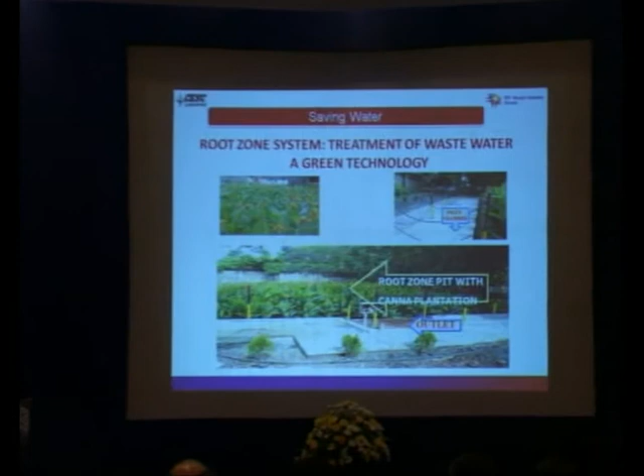But after all those things, nothing goes out. All outlets are blocked now. All things are being reused. And from the neutralizing pit outlet, we use it in a fish pond.

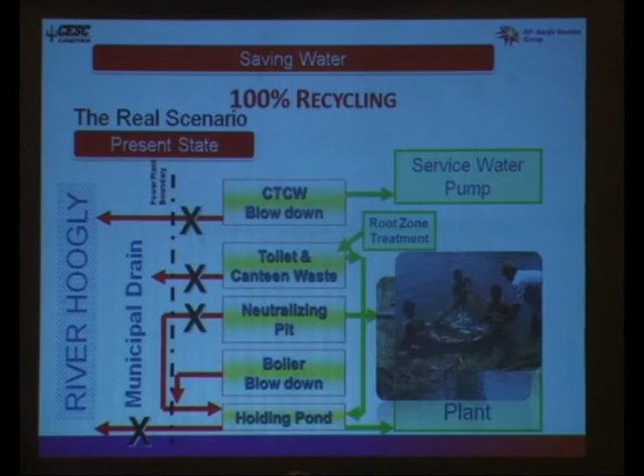At present, in all our stations, we reuse 100% of our effluent, and for that, one good thing has happened: the Pollution Control Board does not take samples from our outlet anymore, because there is no outlet.

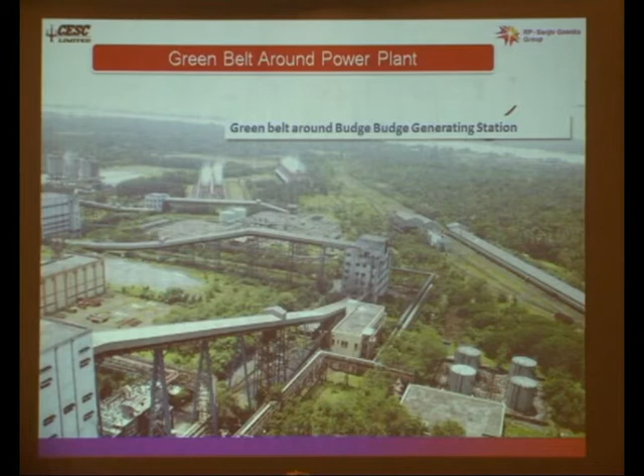We made several firsts, like the first plant to have UNFCCC certificate for CDM project, 100% recycle of effluent, installation of micro hydro turbine at the CW outlet, and wet ESP in our oldest station. These are innovative things we have done.

But believe me, these are not a costly affair. It is a win-win-win situation. Win-win-win means win for customer, win for society, and win for company.